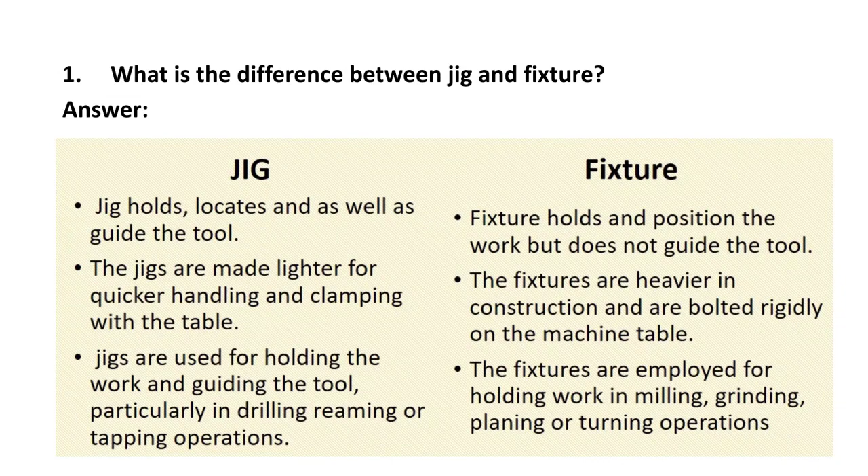Next question: what is the difference between production engineering and industrial engineering? Production engineering basically includes the study of manufacturing processes, metallurgy and metrology, whereas industrial engineering deals with operation research and time and motion study.

Second difference: production engineering helps to find a better manufacturing process, whereas industrial engineering tries to optimize that process. Third difference: production technique is concerned only about the quality of the product, while industrial engineering's approach is to increase productivity and maximize profit.

Industrial engineering involves cost estimation, unlike production engineering. Also, production engineering's approach is towards technical aspects, whereas industrial engineering's approach is towards management.

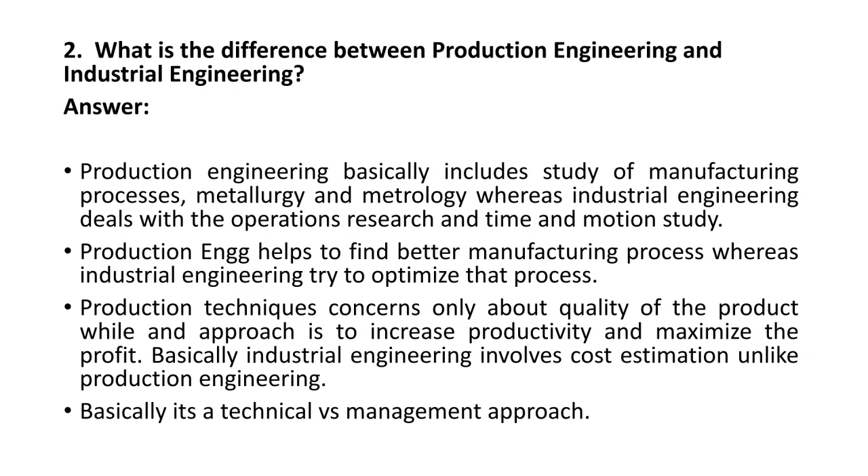Next question: how did you reduce the downtime and increase the production? This question can be asked to experienced candidates, particularly in the field of production. So how did you reduce downtime and increase production? The probable answer is...

We can increase and improve staff communication. Whatever communication happens between members of the team, we can improve that, and through which we can increase production. Then, by holding regular staff evaluations.

Everyone's performance must be monitored, and that can be done by holding regular staff evaluations. Then, set specific manufacturing plant goals. If you set a particular goal, you will definitely work to reach that point, and with this strategy you can increase production.

Then, conduct regular manufacturing equipment maintenance. This is very important, because with faulty equipment you cannot improve the productivity of your department. Then, upgrade your manufacturing equipment. This is also very important.

With time, machines get outdated, so you have to upgrade your manufacturing equipment. Then, create a new technology plan for your manufacturing plant. Again, time to time you have to change your strategy so as to reduce downtime and increase production.

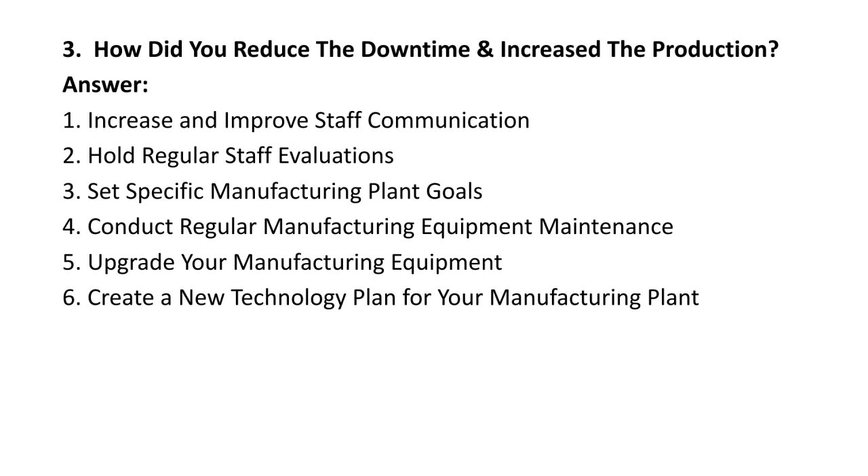Next question: state the difference between manufacturing and services. Manufacturing is concerned with the production or manufacturing of goods, whereas service is concerned with providing services.

The output of manufacturing is tangible, meaning you can touch the product. That is known as tangible - the thing where you can touch is tangible. So the output of manufacturing is tangible, whereas the output of service is not.

It is intangible, you cannot touch it. Suppose you are going to a hotel, and the hotel is providing some service to you, so you cannot touch it because it's not a product. They are giving you service, so that is intangible.

Then next, there is less consumer contact. In the field of manufacturing, there is less consumer contact. If you are working in a production department, the people around you will be your colleagues only, so there is very less consumer contact.

Whereas in service, there is more consumer contact. Using the same example, if you are going to a hotel, the hotel staff deals with you directly, meaning they are dealing with the customer directly. Whereas in manufacturing, that is not happening - the manufacturing department is not dealing with the customer directly.

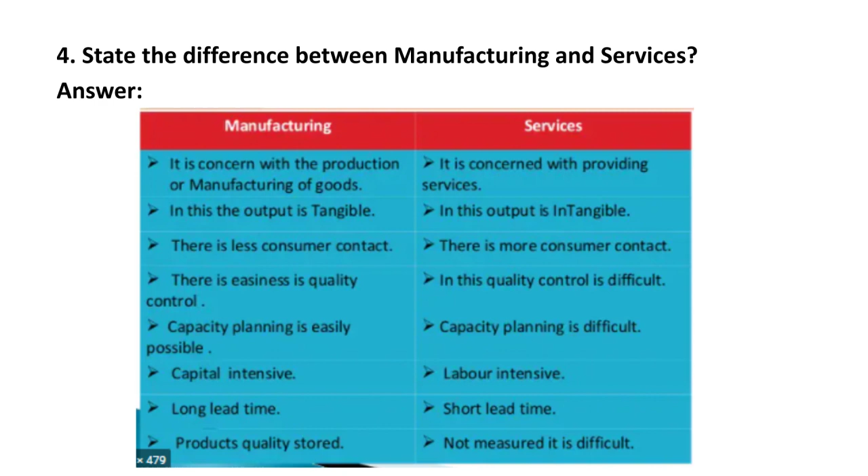Whereas in manufacturing industry, your product is fixed, so you can easily judge its quality in terms of various parameters like dimensions and surface roughness. With these parameters, you can easily judge the quality of the product. Whereas in services, it is very difficult to measure the quality.

Next question: how will you improve the quality during production? This can be the question for an experienced candidate.

The probable answers are: define quality standards. We will define the quality standards, and your product should match with that quality standard.

Then, train employees. This is very important. Time to time you have to train your employees, because as the technology is changing, your employee should be updated with that technology.

Let the technology help the processes - that means you will upgrade your equipment or use advanced technology so that you get a good quality product. Then, upgrade equipment where needed.

Whenever upgradation is possible, you will upgrade the equipment. Suppose you are working with a conventional lathe machine, obviously you will not get a very good quality product. So there is a chance for improvement - you can upgrade that machine with a CNC lathe, and ultimately you will get a good quality product.

Then, create a response plan. Whenever any breakdown or problem happens at the shop floor, your response plan should be ready. With this, you can improve the quality during production.

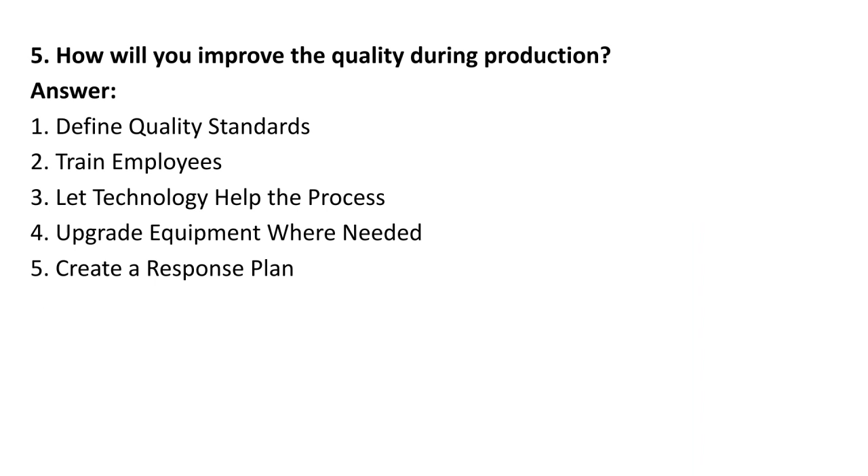Next question: how do you maintain discipline on the floor as a production engineer? If you are facing the interview for production engineer, this is a very important question for you.

The probable answer is good communication with the worker. If you maintain good communication with the worker, then it is easy to maintain discipline also.

Daily production target: you will give them a daily production target so they will not get extra time for chit chat or any indisciplinary activity. By giving a daily production target, you make them busy with their work.

Then, strict action against the undisciplined worker. This is also very important. If any indisciplinary action happens at the shop floor, you take strict action against it, so that you can set an example for other workers that this could happen if you behave in an indisciplined manner.

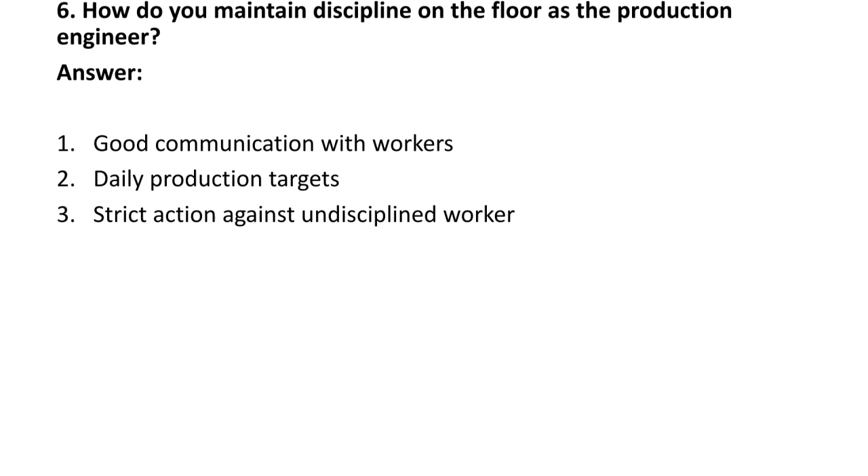Next question: how do you install new machines and prepare the layout as a production or process engineer? The answer is process planning - you will follow the process plan, and according to that you will install the new machine. Process plan is very important.

Process plan is nothing but the list of operations that you are going to carry out over the product. According to that process plan, you can set up the various machines or the plant layout, which you will also consider during installing new machines.

Then, arrangement of the machine according to the process - this deals with the product layout. Depending on the various processes required over that product, you will set the various machines, and accordingly there will be manufacturing. Then, maintain distance between the machines - this is also very important.

And then, safety during the work - safety is also something you have to consider during the working.

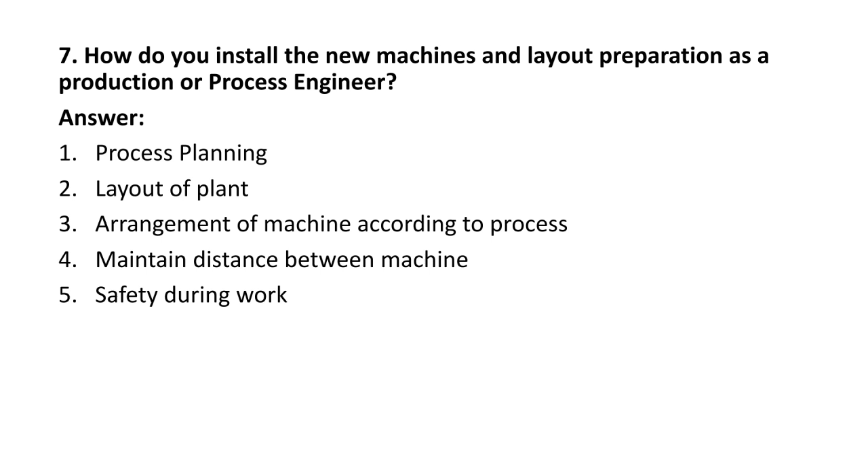Next question: How to reduce cycle time of the process? This can be the question to the experienced as well as fresher candidate. So the answer is replace old machine with the new one. Obviously, if you replace the old machine with the new one, you can reduce the cycle time, because the new machine is with new technology, so it will take very less time to manufacture.

Then use good quality of tool, coolant and raw material. This is also very important. Then training to the workers, so you will train your worker with the new technology. Then the time study report, this is also very important. With this you can reduce the unnecessary movement at your shop floor, reduce the unnecessary movement of the worker, their hand movements, and with this you can reduce the cycle time of the process.

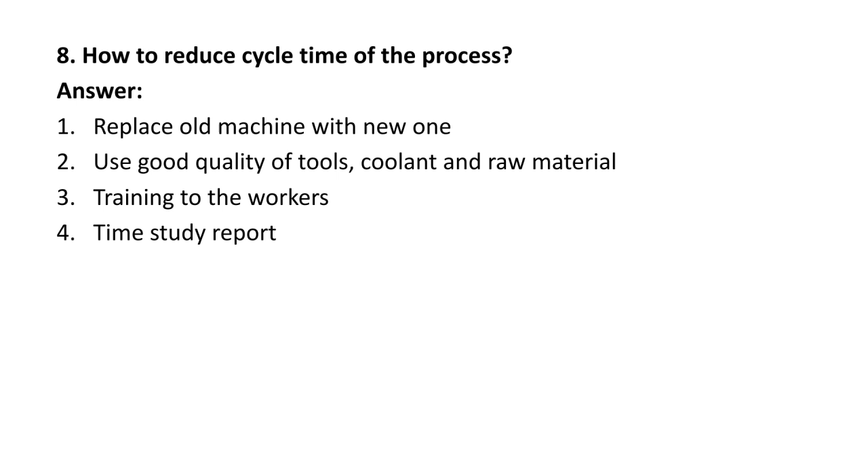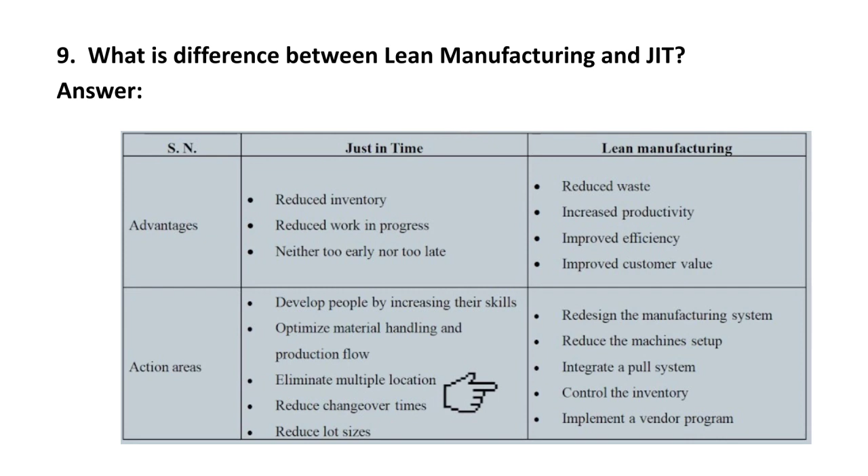Whereas the action areas of lean manufacturing: redesign the manufacturing system, reduce the machines setup, integrate a pull system, control inventory, implement a vendor program. These are the action areas under lean manufacturing.

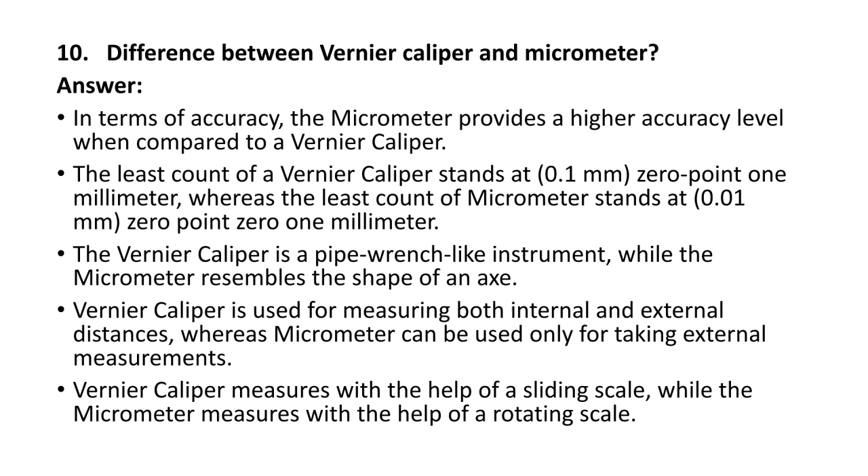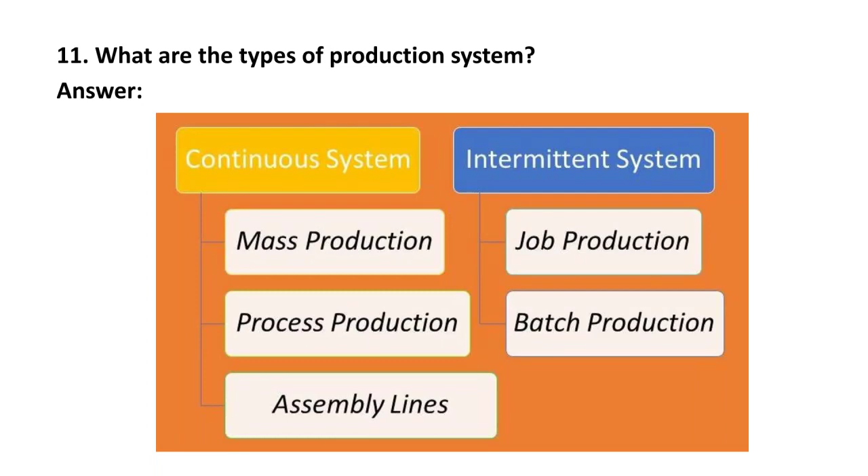Next question: What are the types of production system? We can classify the production system broadly into two categories: continuous system and intermittent system. Continuous system means you are getting your production continuously. The types of continuous system are mass production, process production, assembly line. Intermittent system means you are not getting your product at a regular interval, and it is further classified into job production and batch production.

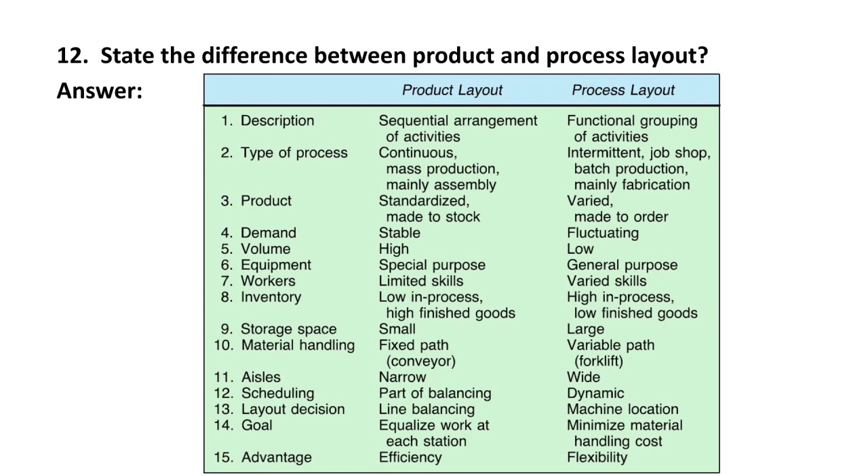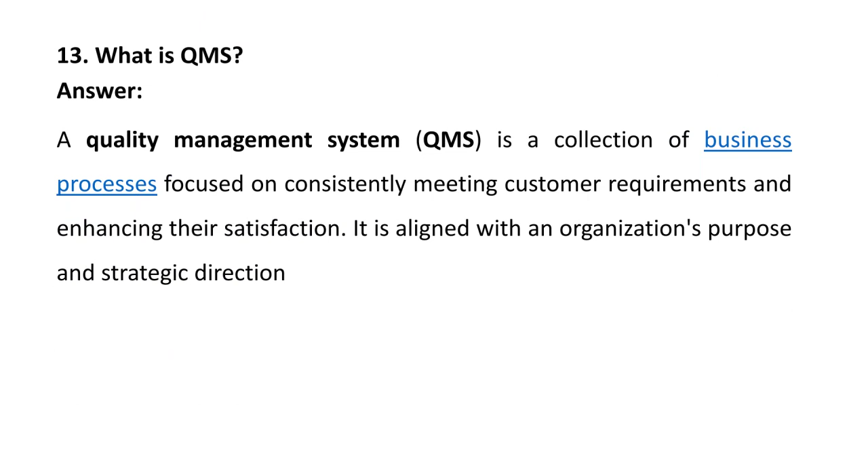Next question, what is QMS? A quality management system is a collection of business processes focused on consistently meeting customer requirements and enhancing their satisfaction. It is aligned with an organization's purpose and strategic direction.

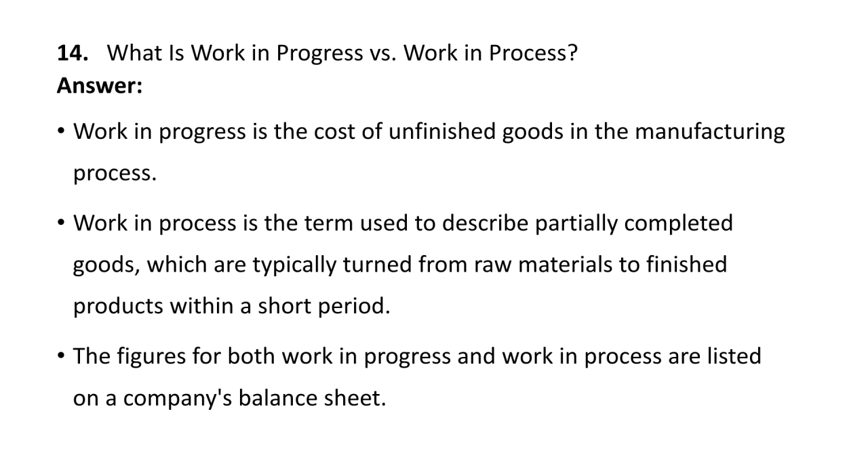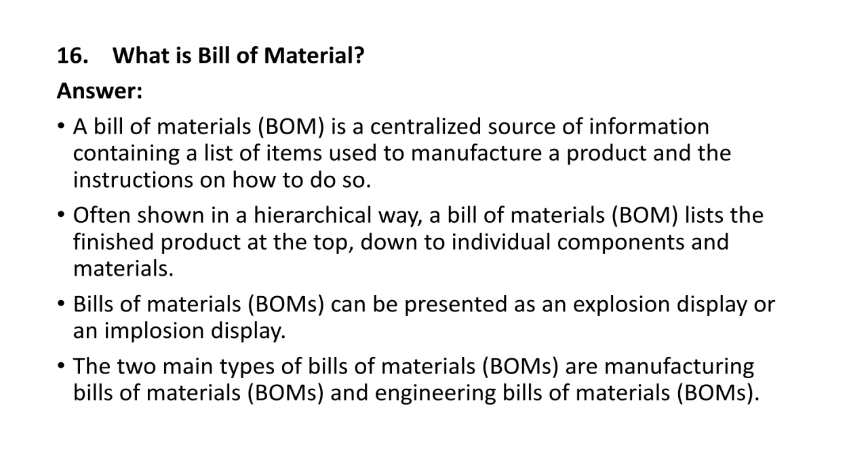The bill of material is a centralized source of information containing a list of items used to manufacture a product and the instructions on how to do so. Often shown in a hierarchical way, a bill of material lists the finished product at the top, down to individual components and materials. Bill of material can be presented as an explosion display or an implosion display. The two main types of bill of materials are manufacturing bill of material and engineering bill of material. Next question, what is Kanban?

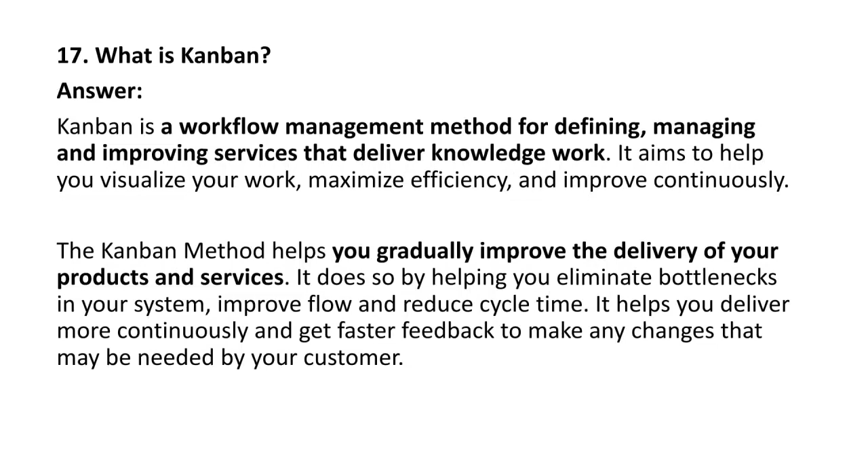Kanban is a workflow management method for defining, managing and improving services that deliver knowledge work. It aims to help you visualize your work, maximize efficiency and improve continuously. The Kanban method helps you gradually improve the delivery of your products and services by helping you eliminate bottlenecks in your system, improve flow, and reduce cycle time. It helps you deliver more continuously and get faster feedback to make any changes that may be needed by your customer. Next question, what is 5S?

5S is a Japanese philosophy. There are 5 Japanese words, all starting with S, which is why it is known as 5S. The first word is Seiri, which means sorting. So whatever is at your shop floor, it must be sorted.

Then Seiton, which means straighten.

After that, the next word is Seiso, which means shine. Your shop floor must shine, meaning it must be clean at all times.

Then Seiketsu, which means standardize. Whatever activity you are doing, it must be standardized, and every time you have to follow those instructions.

And then the last word is Shitsuke, which means sustain. Whatever changes you have made, it should be permanent; there should be discipline. If any change happens at the shop floor, it should not happen that it is only for 1 week or 1 month. Permanently you have to follow those processes. That is under sustain, the 5th word.

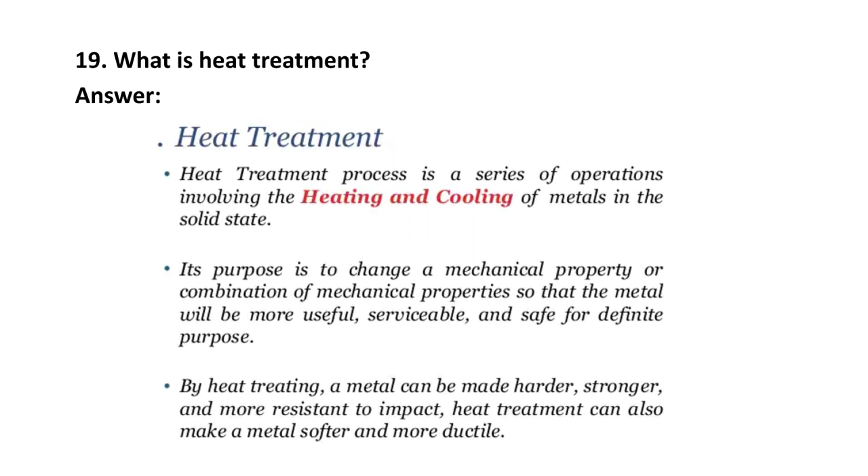Next question, what is heat treatment? Heat treatment process is a series of operations involving heating and cooling of metal in the solid state. Its purpose is to change the mechanical property or combination of mechanical properties so that the metal will be more useful, serviceable and safe for the defined purpose. By heat treating, a metal can be made harder, stronger and more resistant to impact. Heat treatment can also make a metal softer and more ductile.

Next question, what are the steps in Kaizen? This is the last question of this video. Kaizen is also a Japanese philosophy, a Japanese word. Kaizen means change for the betterment.

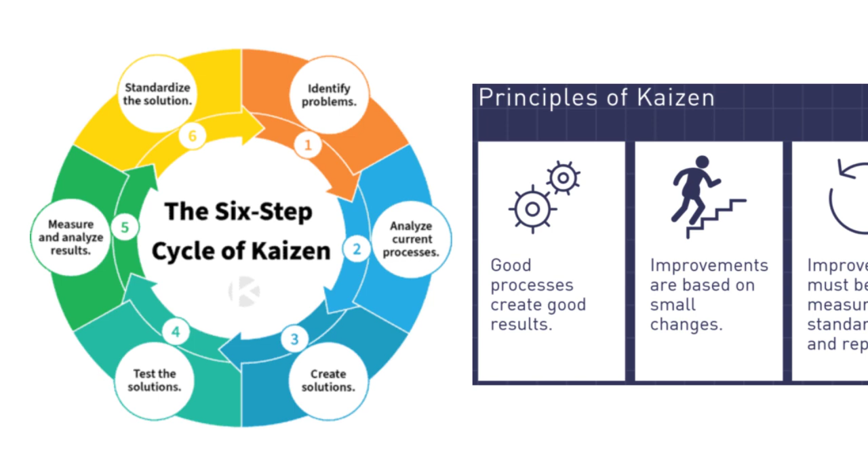There are 6 steps involved in Kaizen. First, you have to identify the problem, then analyze the current process, then create the solution, test those solutions, measure and analyze the result, and then standardize the solution. That is the 6 steps involved in Kaizen.